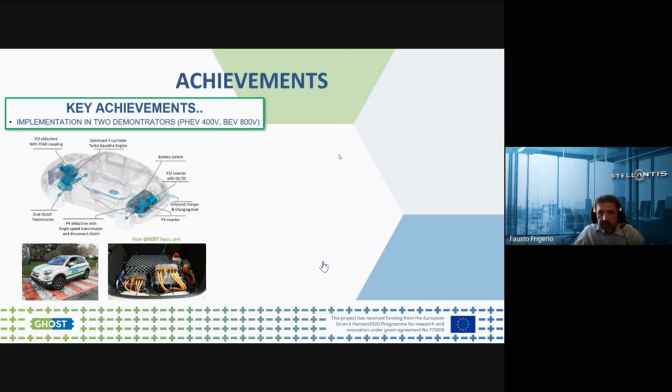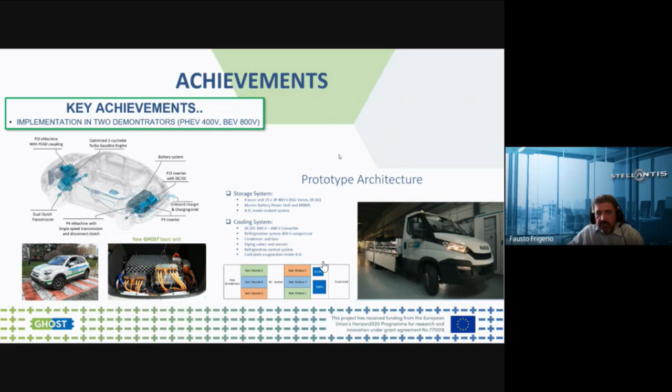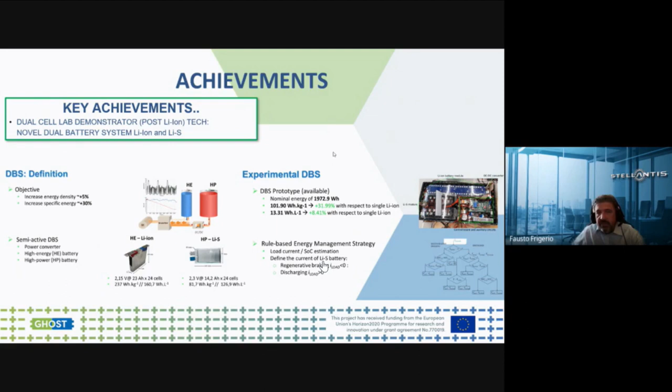...volt battery electric vehicle with ultra-fast charger demonstrator. A novel dual battery system concept was developed. A dual lithium-ion and lithium-sulfur battery system was designed, then the prototype was built and tested, showing significant energy improvement. An integrated measurement system based on electrochemical impedance spectroscopy was developed in order to estimate cell internal states through the hardware without introducing external noise. The system was successfully tested.

Here is the complete list of the key achievements. It includes also the circular economy analysis with the theme of reuse or repurposing of the battery that was addressed, and the business model analysis, including safety, economy, social, and environmental impacts. As a final point, a potential panel of areas of improvement is reported.

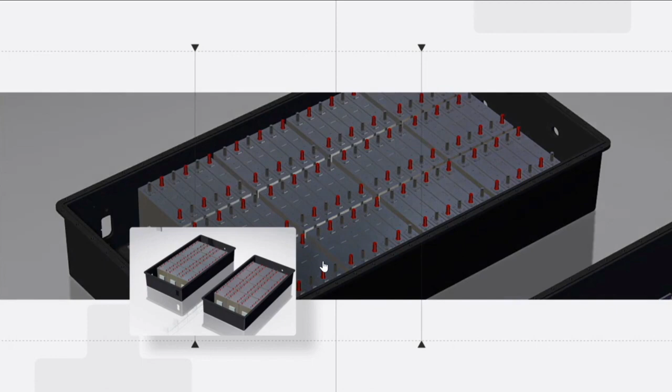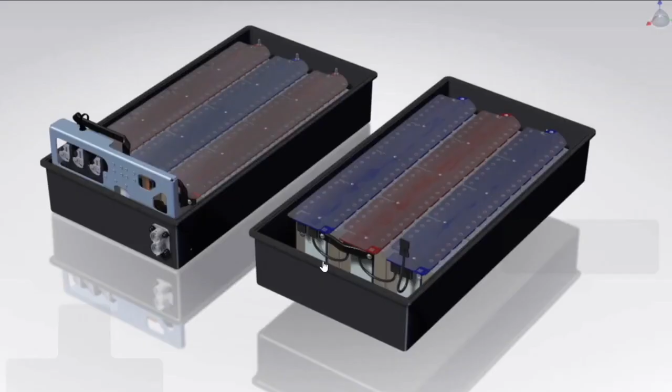Just give me a second. So the next project which we'll be presenting will be Modalis Squared. Modalis Squared focuses in its first half, because it's still an ongoing project, on the development of models and characterization techniques dedicated to generation 3B cells. This contributed to the implementation of a complete modeling toolchain from atomistic to cell level, which can then be used by end users such as material and cell manufacturers, as well as OEMs. And the coming studies will focus on the behavior of solid-state batteries.

To present this project, we have Martin Petit, who graduated from École des Mines of Nancy in 2007 and obtained his PhD in chemical engineering at INPL in 2011. He joined the IFPEN battery modeling team as electrochemical engineer in 2012 and has contributed to the development of electrical storage system models for system simulation in automotive applications, especially implemented in the Simcenter Amesim libraries. Since 2013, Martin is involved in activities around lithium-ion battery safety modeling, and he has been coordinator of the H2020 project Modalis Squared. Thank you, Martin. The floor is yours.

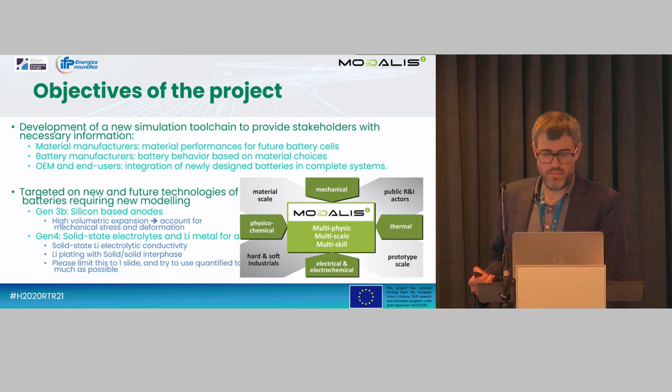So the main achievement that we had in this project is dedicated for the moment to generation 3B batteries, where we have been working up until now. So first, we have developed specific electrodes and batteries based on the materials that have been chosen. So we chose NMC 811 from Umicore as a positive material, and a blend electrode, a composite material with silicon oxide and graphite at the negative.

So we had 20% of silicon included into this material, and this is important because with this amount of silicon, we can see the impact on the mechanical behavior of the composite through the lifetime of the battery. And it has a lot of impact also in the manufacturing phase and the issue with cycling that we can see from the first cycle of the battery. So the positive material was, as I said, given by Umicore. The negative material was a commercial one, so we needed to characterize it.

So we did specific characterization using SEM and TEM, and this allowed us to understand what was composing this material, especially with silicon inclusion into a silica matrix and embedded into a graphite layer. Thanks to that, it was possible to send them to the other teams in order to create a dedicated modeling of this material in order to understand or predict its behavior.

We did also the electrochemical characterization and specific swelling measurements using an electrochemical dilatometer in order to understand the swelling of the complete electrode. So in parallel, we developed the atomistic and molecular modeling in order to understand the behavior of the material.

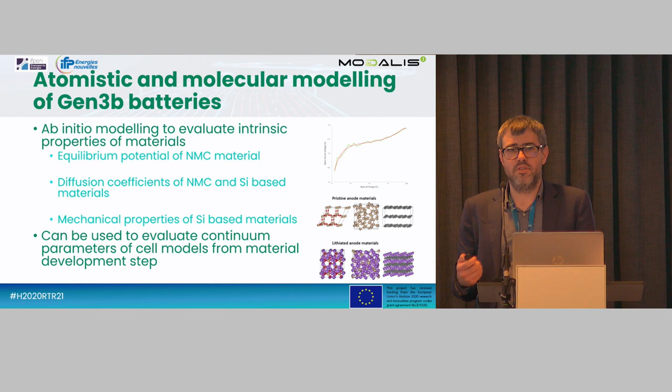Then the second focus was to understand the mechanical behavior of the cell. And this is also a multi-scale step because there is a lot of complexity in the materials that we are using in the negative electrode.

So first, based on the TEM analysis that we did on the material, a specific work has been done to recreate this in FEM in order to understand the behavior of the composite material that is composing the particles of the electrode. This allowed us to understand how the particle was swelling in order to put it into a complete 3D FEM model to understand the swelling of the electrode and the electrochemical behavior resulting from this swelling.

So it was done by Solvay in this case in order to understand how the electrode was swelling and some inhomogeneities that we can see in this swelling.

And then also, in order to focus on the aging and the degradation that we can see in the electrode composite with the binder and so on, DEM simulation has been done in order to understand how the grains are working all together. And also, thanks to DEM, since FEM was not fit for such high deformation, we could also monitor the bonds between the particles in order to understand what was occurring during the swelling and how the bonds were deteriorating, in order to evaluate aging of this system.

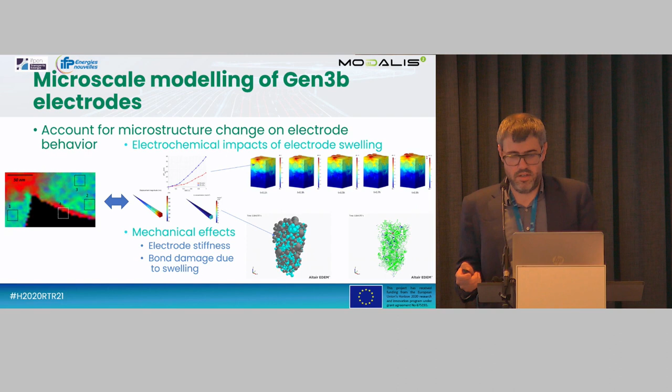Finally, this was implemented into a continuum model, based on the Newman approach and a simplified Newman approach, which is SPMe, so single particle model with electrolyte. We are able to model the complete system with two particles, one for the graphite, one for the silicon, and take into account the mechanical behavior in terms of nominal working.

So when the swelling of the particle occurs, we have a swelling of the whole electrode, so of the whole battery. So we can see how the battery is working and swelling within the system. And this is really interesting for integrators in order to account for this swelling at the whole system level, and take into account the fact that the battery for one cell will grow by 0.5 millimeter. So if you have 100 cells, you have a higher swelling that needs to be taken into account at the system level.

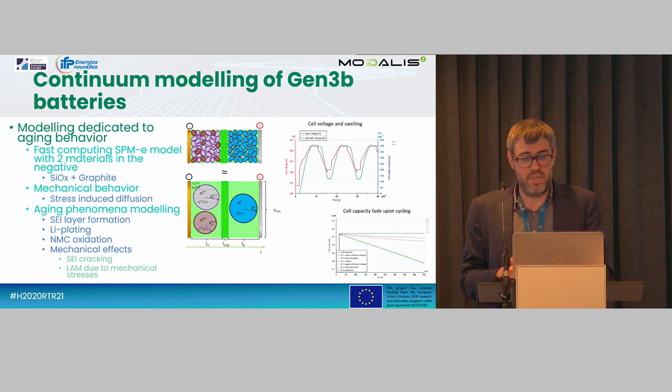Then the mechanical behavior is also taken into account for the electrochemical behavior of the cell and also for the aging. So a lot of aging behaviors are impacted by mechanical aspects. So we added into our model many aging phenomena, especially the mechanical effects such as particle cracking, loss of active material, and SEI cracking.

So the aim of this is to create a complete tool chain. And so thanks to this first work on Generation 3B, we are able to communicate within partners, because when you are talking to atomistic modelers, modeling teams, integrators, there are different languages that you need to use. And it's important to make sure that the inputs that we get from atomistic are in line with what you expect from your continuum models.

So that was the first step that has been done, and now we are able to get some parameters from the DFT into mechanical particle behavior, into DEM or FEM at the electrode level, and finally implement it at the cell level. So this cell level is fit for aging behavior, so it's interesting for us to use that for 10 or 20 years simulated in our systems, and also for 3D cell behavior, where you can see especially the design of your cell and make sure that you have homogeneous behavior inside your cell.

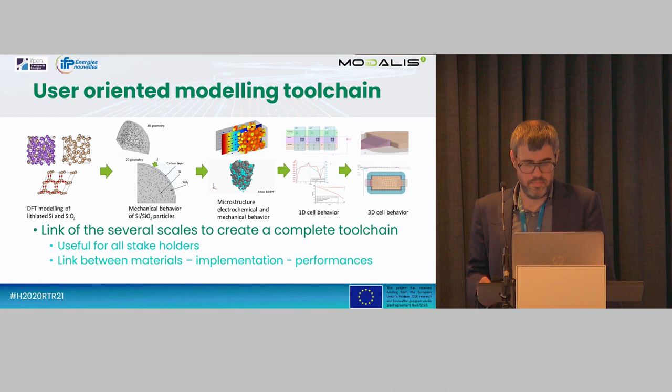Now that this has been developed for generation 3, the work has begun also on generation 4 in order to understand the behavior of electrolytes. So the main subject of study that we are using is sulfide electrolytes, especially argyrodites, with several formulations. So this will aim at comparing the result from one formulation to the other, thanks to atomistic modeling, and then predict the new behavior when you change the formulation.

And then we'll go to glassy sulfide, which is a new challenge, especially for atomistic calculations, which are much more complex. At the same time, we have adapted the SPMe model for solid-state electrolytes. So the good point is that the electrolyte model that we are using is in line with what we expect for solid electrolytes, so the development is lighter.

However, we need to develop a completely new interface for the negative electrode, especially since we have no particles, so single particle is not really well suited for this kind of approach. So we need to create a new framework in order to account for the specific surface behavior of the lithium, and how it changes over time due to dendrite formation or mossy surface formation.

The atomistic and molecular work will focus on mechanical properties and conductivity prediction for the electrolytes. And we have to develop also the experimental work in order to make sure that the experiments that we are doing will be comparable in the end with what we expected from the calculations.

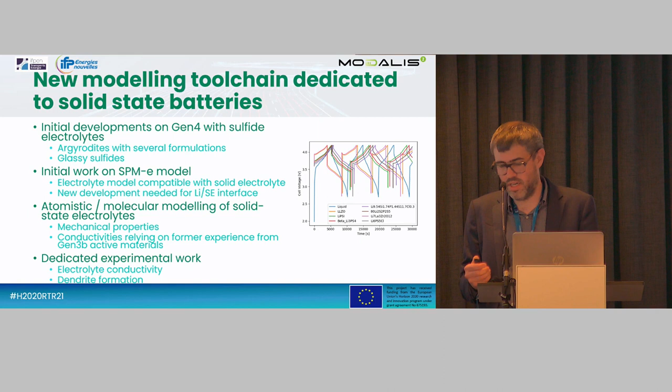So the main impact that we want to give with this project is to fulfill future industry needs in order to integrate new materials and new battery cells into the complete systems. So this will give a competitive advantage to the European industries by creating links between all stakeholders.

When Solvay is developing a material, they need to show to their cell manufacturers that the material will be, in the end, more efficient or more suitable for their final use compared to a competitor material. And using the toolchain, they can use the results for their calculations in a complete cell simulation to say, okay, thanks to my material, your cell will last longer and you will have less resistivity or better interfaces and so on.

The same way, a cell manufacturer can provide specific parameters for an OEM in order to efficiently integrate the cell into a complete car or system or storage system. Or they can improve or optimize the integration of the material into their own batteries in order to provide better batteries. And for OEMs, they can anticipate the new technologies in their integration of battery systems into their vehicles or electrified systems.

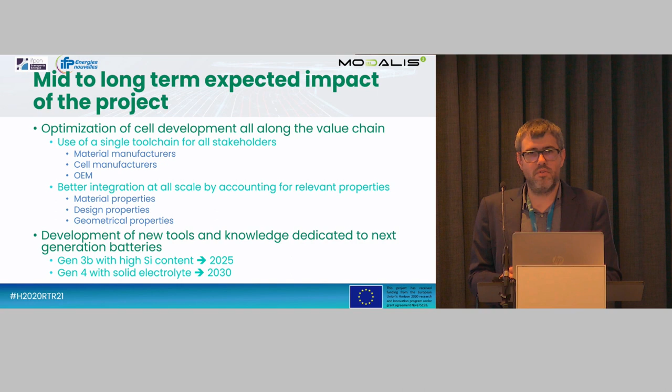So the aim of this project was also, as I said, to focus on new technologies, especially Gen 3B and Gen 4. So maybe for Gen 3B, we were a bit optimistic in the beginning in terms of achievements for silicon integration. However, it's still an objective to see some high silicon content by 2025. So this toolchain will be very useful at this time to use the models for these technologies in 3 years from now. And for Gen 4, by 2030, this toolchain will be able to handle the behavior of the solid-state electrolytes for next developments.

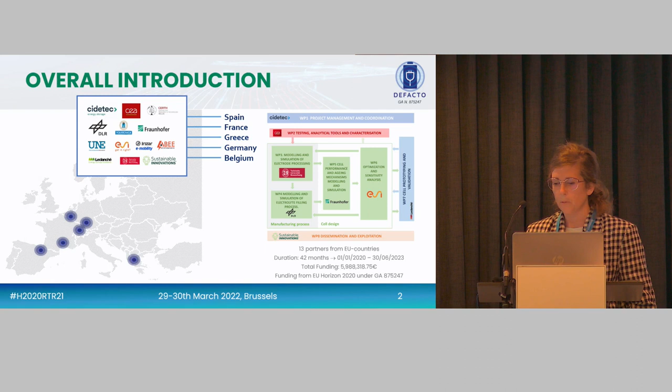So as I was saying, the overall aim of DeFacto is to gain more understanding on the manufacturing processes and how these processes are impacting directly on the cell performance. So we aim to couple manufacturing of the cell to aging of the cell through different workflows, models at different scales, in a way that in the end we can suggest and provide guidelines on cell developments, but also attending on the manufacturing.

In particular, what I'm talking about is that in the end, we will know exactly which are the main parameters we should touch in the machines in order to have a certain outcome or expected performance of the cell.

So the specific objectives, as we are relying on modeling, is that we need to develop models that are really accurate so that they can mimic the real behavior of different steps in manufacturing, but also at a certain level of cell performance and aging. So we need accuracy in the models, but also efficiency. And it's quite difficult sometimes. But this is the first and main objective of the project.

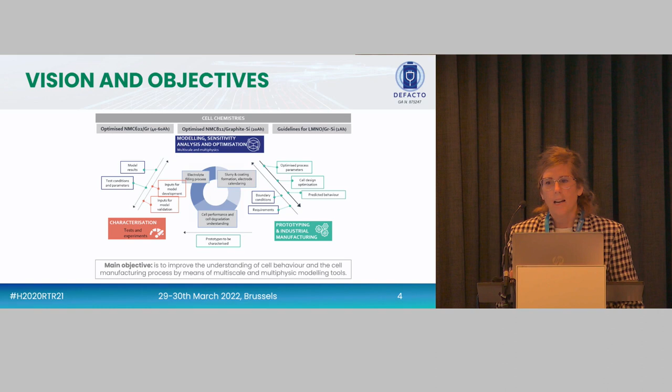This is the main picture of the project that explains the general activities. The main objective of the project is to gain more understanding between manufacturing and cell aging, and coupling both aspects through modeling.

So far, regarding manufacturing and experimental work, we have manufactured industrial scale cells. We have also developed prototype cells, NMC 811 graphite silicon, and started characterizing at all scales, from material to electrode.

This is also very in line with the modeling activities, because in modeling we are approaching these different scales, and we have particular needs from the modeling developments that need to be filled through this experimental work.

We are characterizing material at a structure level, composition, and so on. We are getting parameters for feeding all the scale models, like tortuosity, but many parameters—around 40 at the continuum scale, and similar at the mesoscale, which I'll explain later.

We are also running particular experiments to capture certain steps in the manufacturing, such as the electrolyte filling steps. We already assembled a specific setup for that.

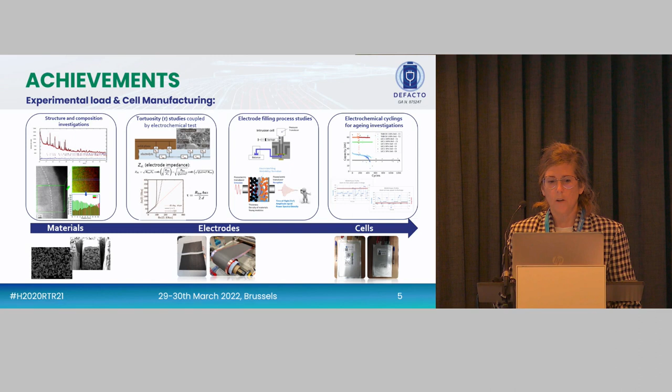Once we have built these cells, we perform electrochemical aging to understand different degradation mechanisms. Now we will start carrying out post-mortem analysis to figure out the main mechanisms that will later be implemented into the models. So these are the advances on the experimental work and cell manufacturing.

Now coming to the modeling, we have two main activities. The first is on manufacturing, and the second is once the cell is already built, when we run aging tests or cycling tests.

This summarizes all the achievements in manufacturing. We are focusing on the lithium-ion cell, mostly on the current roll-to-roll electrode processing step.

In the modeling of manufacturing, we focus on two main critical steps: electrode processing and electrolyte filling. Within electrode processing, there are three main steps that are time-consuming and critical, because they fix the structure of the electrode that later will last more or less depending on the particularities: slurry preparation and dispersing, drying, and calendering.

First, we set up all the models regarding this electrode processing. So you can see—I hope the video is working.

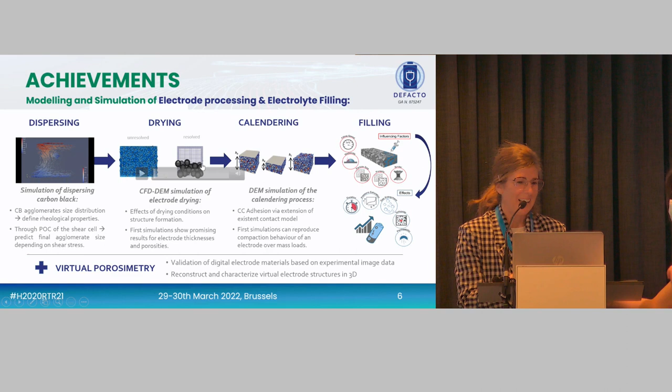Okay, sorry, maybe you can put play. If I manage... no, okay, it doesn't matter. Don't worry. But okay, you can imagine. Otherwise, you can ask me for a picture afterwards, or you can directly contact myself.

So within these steps, they are resolving DEM coupled to the CFD, and then they can correctly capture the thickness evolution and porosity of the electrode, which is a very important parameter in the next steps. This is what they have done so far, and now again they will carry out sensitivity analysis in order to identify the main critical parameters. This step is particularly energy consuming.

Then jumping to the calendering, which is the final step in the electrode processing. The electrode is inserted between the two rolls, and then you put pressure on it, and you finalize or freeze the microstructure of the electrode.

At this stage, we have developed discrete element methods to mimic the calendering behavior. So now we can predict certain thickness, porosity, and even tortuosity values for certain parameters of the machines, which is really important. This is all about the electrode processing, and now jumping to the filling step.

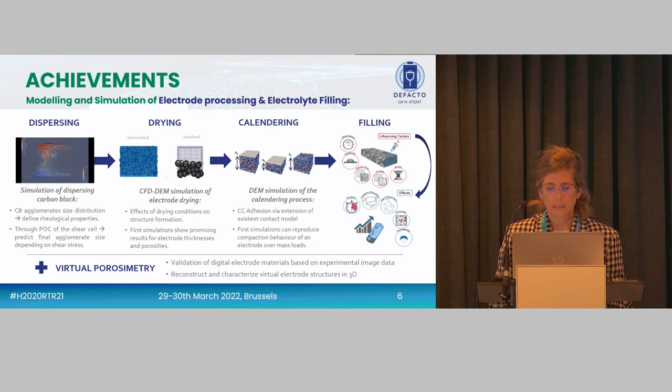So now jumping to the modeling of the cell performance, we are very much focusing on the cell degradation, particularly emphasizing the mechanical degradation. We are covering different scales, starting from the atomistic approach, then microscale and continuum scale.

This continuum scale model has then been reduced by advanced reduced order models, and this is open source and available to the community. I will explain later.

This is the tool that will also be used for optimization purposes, to guide manufacturers on which component they should modify to achieve certain parameters.

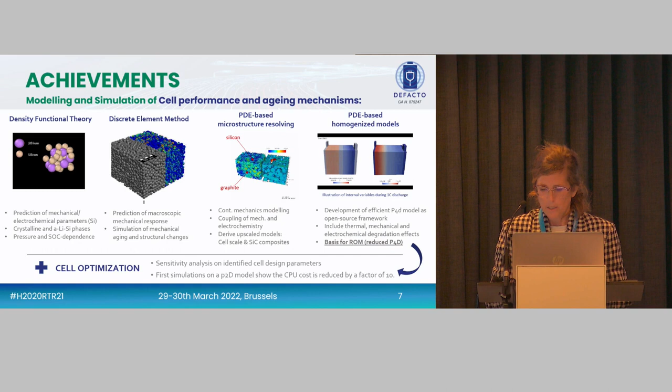So this is about the open source tool we have just released, and it's available on our website. It's a P4D coupled to the reduced order models, and it combines the cideMOD tool, which is available on GitHub, with ECROM, the reduced order models.

If you are interested, you can download all this information — we have the programming manuals, installation guide, and also the tutorial available, and it's released under the GPL Affero license.

This is from the technical part, and we have also been contributing to standardization. We have in mind to launch two proposals for CEN and CENELEC workshop agreements. We have already submitted the first one, on the data required for modeling of the material, cell, and manufacturing processes, because we are aware of the importance of data acquisition and protocols.

And the next CWA will be on the experimental and characterization techniques to achieve this data.

We also had a workshop on the digital approach, where we had the opportunity to discuss modeling approaches with different Cluster 5 projects. We've been presenting this at different events, such as clustering events and also Battery Innovation Days.

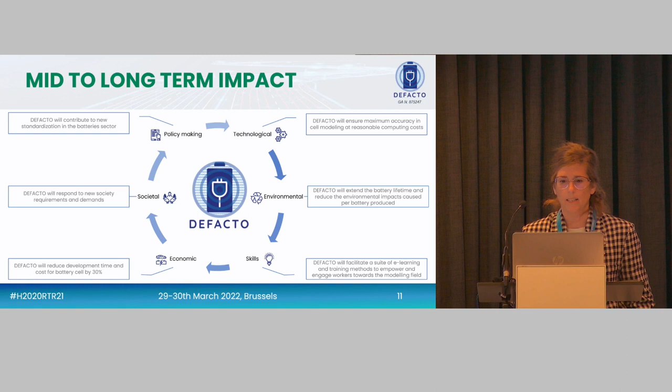And then also standardization - it's a critical, very important aspect in which we are somehow contributing, but there is a long way to still work on. Because data needs to be standardized, communication, many aspects, models, validations - there are many aspects that still need a little bit more work.

So yes, with this I would like to end. Thank you very much. If you have any comment, you can reach me by email, otherwise later on. Thank you.

Great, thank you, Elisabeth. I think with that we conclude the overview on modeling and characterization of cells, but thank you for your presentation, especially the part where you spoke about the dissemination and having made the open source tool available, and your final reflections, which I think will give fuel to the Q&A.

Okay, the next project is Image. Image is a concluded project. I think it has a slightly different purpose than the previous three projects, because Image focuses on innovative manufacturing routes for a next generation battery in Europe.

The presenter will be Wolfram Kos from AVL. Wolfram finished his PhD in technical chemistry at Graz University in 2005 with a focus on lithium-ion anode materials. Then he worked for Roche Diagnostics in Graz in the development of electrochemical sensors measuring glucose, oxygen, carbon dioxide, and ions in blood. Afterwards, joining Austrian Institute of Technology in Vienna, he worked on 5-volt lithium cathode materials and was technically responsible for the installation of a lab-scale production for a laboratory for lithium-ion cells. And since 2017, he's been working at AVL, supporting automotive battery development projects, and has been the project coordinator of IMAGE.

Thank you, Wolfram. Thank you very much for the introduction. I'm glad to be here today and to present the results from our IMAGE project.

Oh, that does not work. Wait, double click. Oh, I don't like it. Enable. Yes, it works.

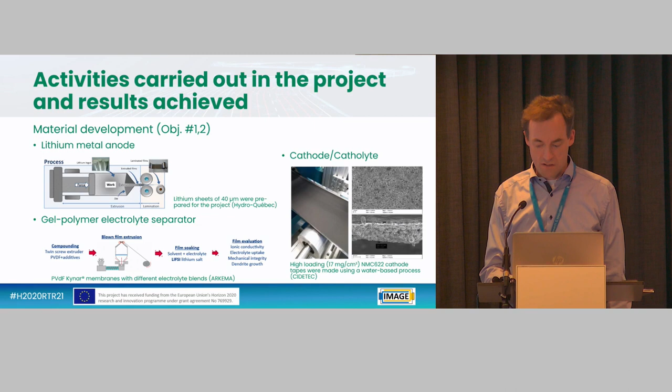The next step was to bring together these materials and to start building up cells. For cell assembly, there are basically 2 ways, we found out. So either you take the components, which is cathode and separator, and bring it together with some electrolyte, let it soak from the outside. So under very controlled conditions, the soaking is very good, but the handling afterwards is very problematic.

Or you go for the other method: you do an assembly of the dry components first and put in the electrolyte afterwards. So the second method is closer to what we have in state-of-the-art cell manufacturing today already. It also turned out that with this method we get the more reliable cells, the more reliable results. However, the process is still far more complicated than with state-of-the-art cells.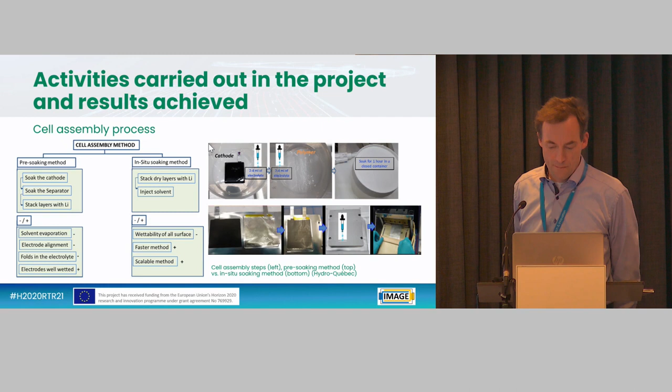So lots of coin cells were made in the course of the project, mainly to study the materials, material properties, and make a characterization of these components. Then monolayer pouch cells were built, and finally also some multi-layer pouch cells of close to 2 ampere hours were built and characterized. The small cells were rather tested at the material manufacturers and at the universities. The multi-layer cells were rather tested at Varta, at BMW, and at AVL.

I put in one of the pictures showing one of the cells from CIDETEC in a fixture which is measuring the volume changes. So as a takeaway, if you upscale one of our 2 ampere hour cells to a modern 60 ampere hour cell, a volumetric energy density of 850 watt-hours per liter is possible, also 450 watt-hours per kilogram. However, for the cells we could build in our project, the cycle number is not good enough for the automotive industry at the moment.

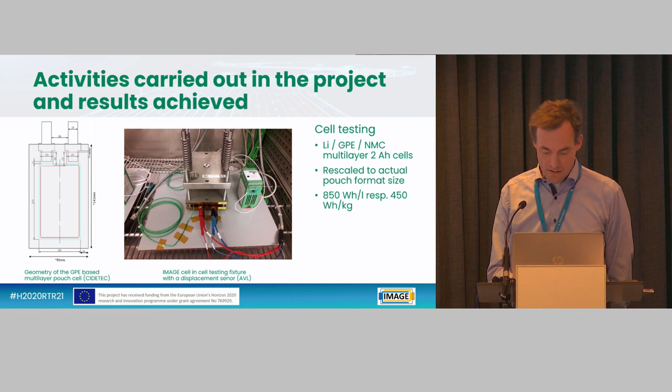So the next activity in the project, if you go for cells of a new novel chemistry, was how to build up modules and battery packs afterwards. So we double-checked what's the theoretical swelling of these cell systems, and what's the expected pretension force needed. So these are, in our case, the major properties which are changing.

And we found out with the results from the first monolayer cells that it is possible to go with a rather conventional module concept. We were already discussing pneumatic or hydraulic systems for applying a defined pretension force. We found out that with compression pads which are under development at the moment, it's also possible to buffer away the volume changes and to apply the higher pretension force needed for the gel polymer electrolyte cells. So this was based on the cell testing.

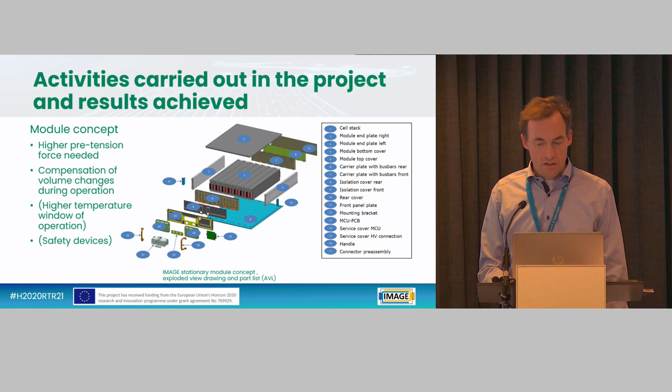And I'd also like to highlight another activity of our project, which was done by CICe. So it was going beyond gel polymer electrolyte. It was a screening of what is in literature on solid state materials in general, of all types of chemistries of solid state materials. It is a focus on material properties: how do they fit into the battery industry in terms of the properties needed for separator and for compatibility with anode, cathode.

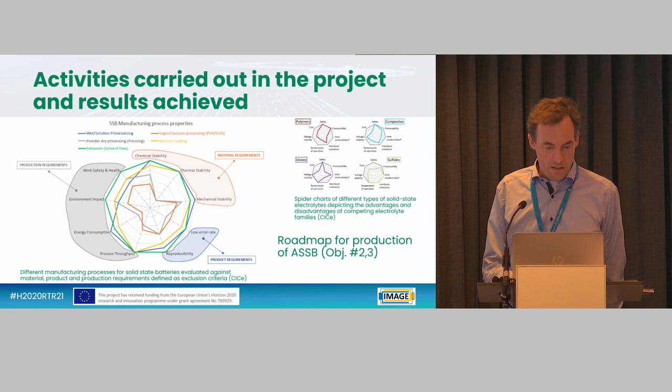And also it was a review of the different ways of synthesis of this material, to double check the manufacturing. Please, if you see these results for material requirements, keep in mind this is reflecting the state of the art. So with every innovation coming up, this will change a bit. And also, to my understanding, not every all solid state material is compatible with every way of manufacturing described herein. So this is another major topic of our project.

Let's come to the impact of our project. There were some specific questions in the draft of this presentation. I'd like to distinguish the impact in a technical impact and the social impact. The technical one is we learned from our cells, if you go with lithium metal, you can increase the energy density, of course. The manufacturing is easier, it's less complex. You avoid preparation of anode tapes, so it's less energy intensive also. A cathode which is manufactured by an aqueous way is environmentally more benign. So that's the key technical impacts.

And from the social point of view, there was the opportunity for a new generation of students to learn electrochemistry in an industry research project. I had the opportunity some years ago myself. So it's seeing what industry is working like, what scientific institutes work like. It was sometimes a bit of a challenge for me, there are frequently new faces, but overall I think this is a very positive point to mention from the project. Also, a collaboration between the partners was enabled, respectively intensified. Some partners knew each other before, but many of them were very new to each other.